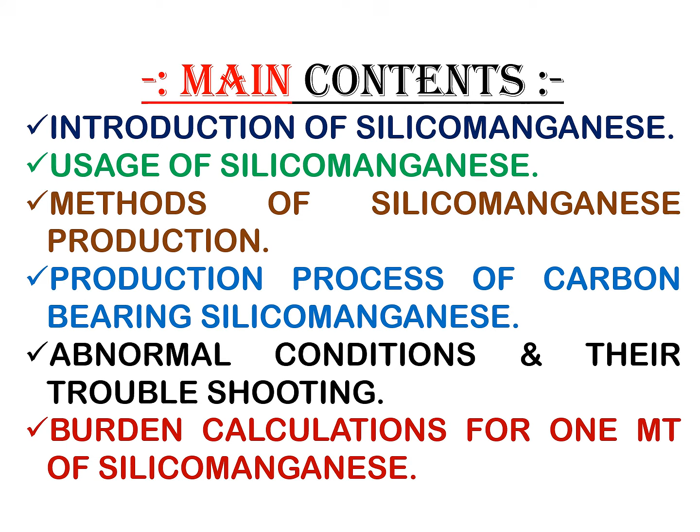This is a very important aspect, as I will teach you how to calculate the burden for 1 metric ton of silicomanganese, and it is very important. So step by step the burden calculation steps I will be covering in this video. So do watch the video till the end. Let's get into the video presentation for today.

To start with, silicomanganese is widely used in extractive metallurgy as a complex reducer, deoxidizer and an alloying addition in the production of various grades of steel.

Moreover, the silicomanganese goes for the production of refined grades of ferromanganese.

Silicides of manganese are more stable compounds than manganese carbides, since the heat of formation of manganese silicide from the elements is 14,000 calories, while that of Mn3C, that is manganese carbide, is 3600 calories. Therefore, the higher the silicon content in silicomanganese, the lower is its carbon content.

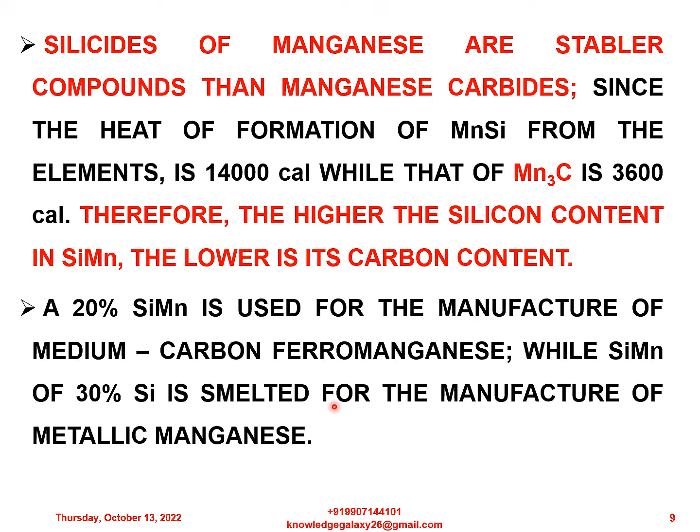The 20% silicomanganese is used for the manufacture of medium carbon ferromanganese, while silicomanganese of 30% silicon is smelted for the manufacture of metallic manganese.

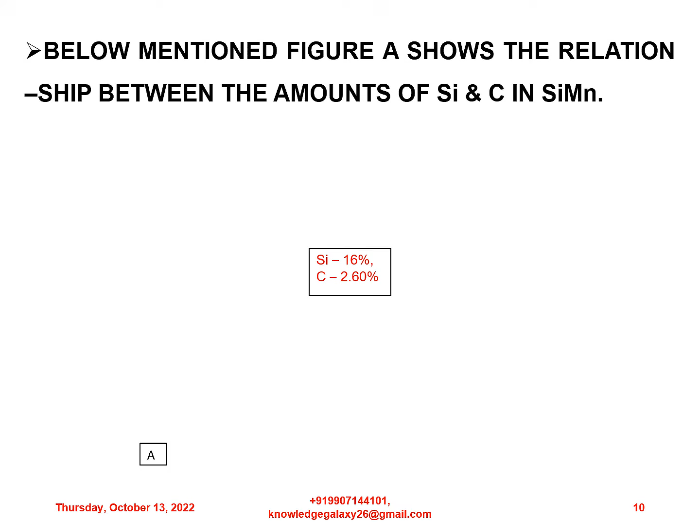This graph shows the relationship between silicon and carbon in the silicomanganese. As can be seen, the optimum silicon content, that is 16%, carries carbon up to 2.6% maximum.

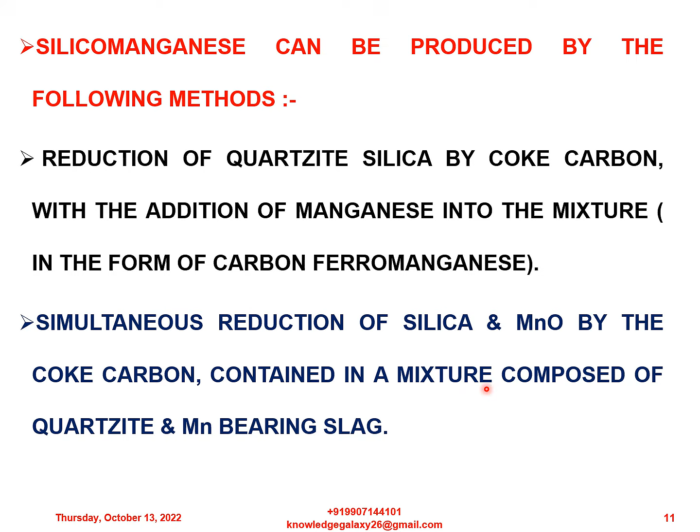Silicomanganese can be produced by the following methods. First, reduction of quartzite silica by coke carbon with the addition of manganese into the mixture in the form of carbon ferromanganese. Second, simultaneous reduction of silica and MnO by the coke carbon contained in a mixture composed of quartzite and manganese bearing slag.

So again, let's move on. The second method is more advantageous, as in this case silicomanganese is obtained by the simultaneous reduction of silica and manganese in the same apparatus, and that is more economical also.

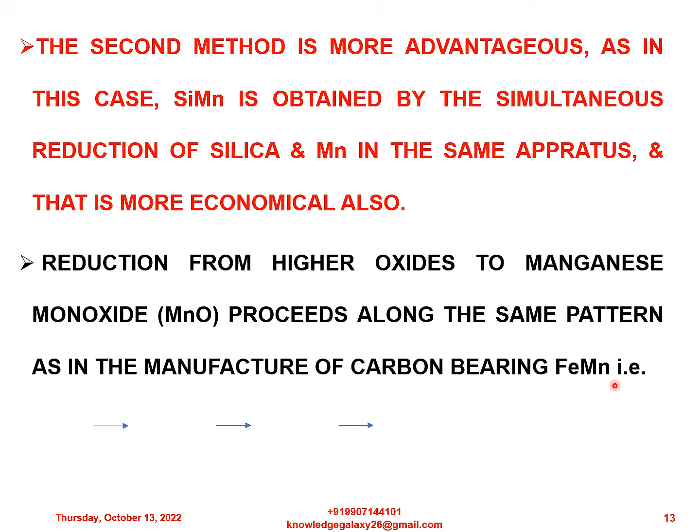Reduction from higher oxides to manganese monoxide, that is MnO, proceeds along the same pattern as in the manufacture of carbon bearing ferromanganese. These are the steps by which manganese higher oxides are converted into lower oxides: MnO2 transforms to Mn2O3, then to Mn3O4, and finally Mn3O4 transforms into MnO.

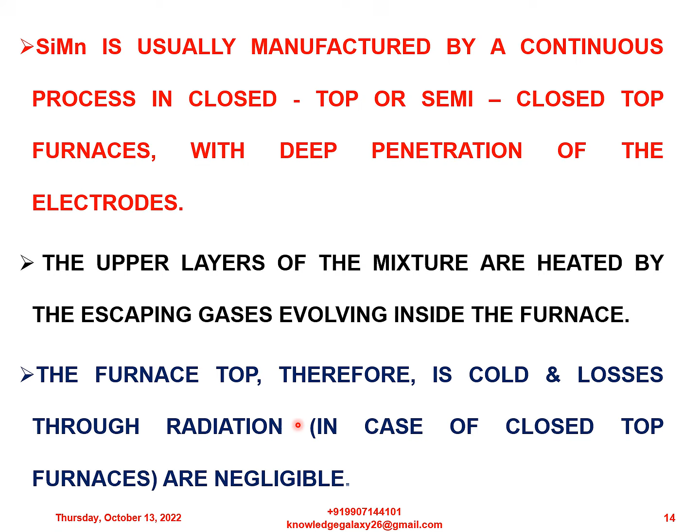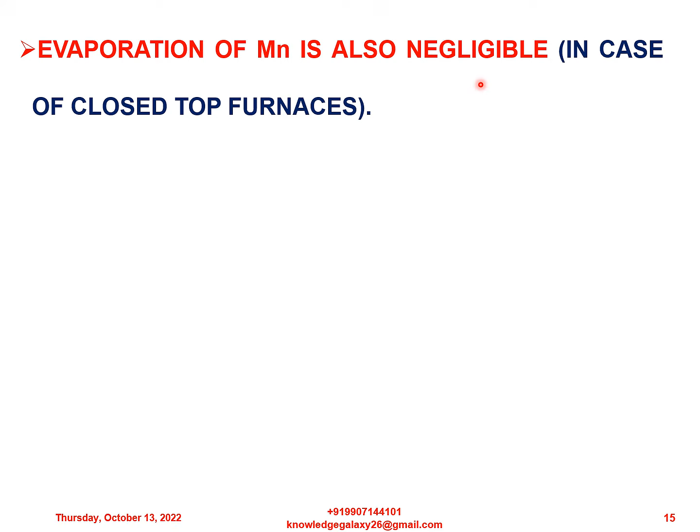Silicomanganese is usually manufactured by a continuous process in closed top or semi-closed top furnaces with deep penetration of the electrodes. The upper layers of the mixture are heated by the escaping gases evolving inside the furnace. The furnace top is therefore cooled, and losses through radiation in closed top furnaces are negligible. Evaporation of manganese is also negligible in closed top furnaces. Silicomanganese with 20 to 25% silicon is easily obtained by this method.

Difficulties arise when the second method is used for manufacturing alloys with higher silicon content, above 25%. This is due to the silica content in the slag rising with increasing silicon content of the alloy, thus raising the viscosity of the slag and rendering its tapping difficult. These difficulties can be overcome by smelting the alloy in small furnaces with higher slag basicity and by introducing small amounts of fluorspar into the mixture.

Silicomanganese is used for the smelting of refined ferromanganese, at present manufactured from a mixture composed of MnO-rich slag, quartzite, manganese ores, fine coke and iron chips. The introduction of MnO-rich slag into the mixture permits the manufacture of silicomanganese with a minimum phosphorus content.

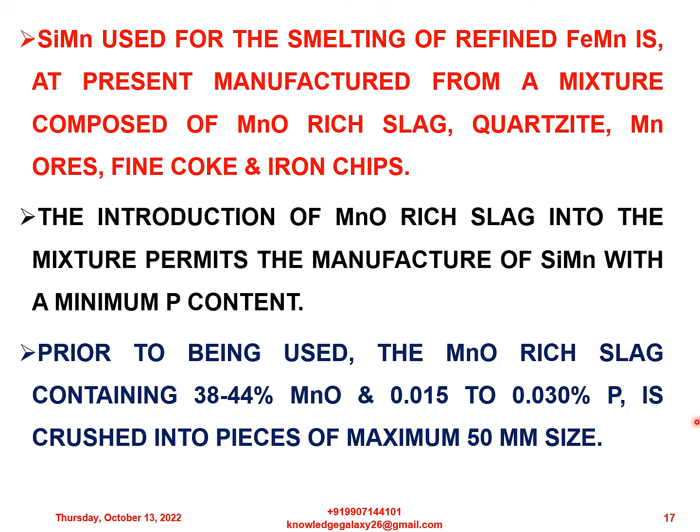Prior to being used, the MnO-rich slag containing 38 to 44% MnO and 0.015 to 0.030% phosphorus is crushed into pieces of maximum 50 mm size. Quartzites should contain a minimum of 96% SiO2 and maximum of 0.012% phosphorus, used in lumps of sizes not more than 60 mm. Fines of less than 10 mm shall be screened out.

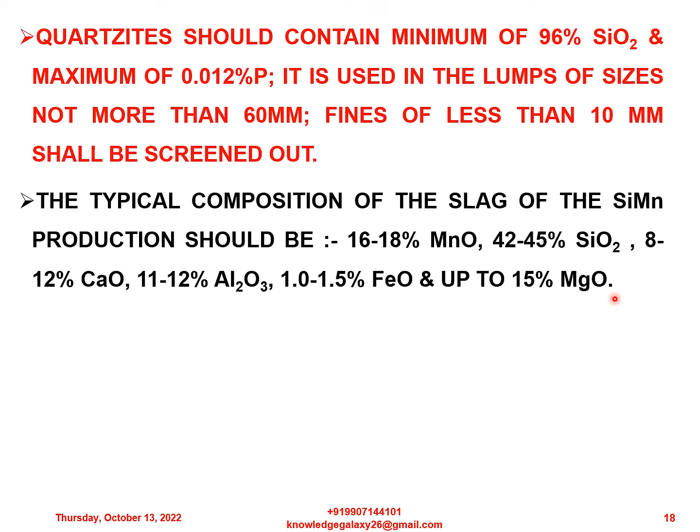The typical composition of the slag of silicomanganese production should be 16 to 18% MnO, 42 to 45% SiO2, 8 to 12% CaO, 11 to 12% Al2O3, 1 to 1.5% FeO and up to 15% MgO. My dear friends, this is very critical information which I just shared with you all, so do remember this very carefully.

Alloy and slag are tapped out simultaneously 3 to 4 times per shift depending upon the liquid metal and slag handling facilities in the tapping bay. Each heat of silicomanganese is analyzed for manganese, silicon, carbon and phosphorus contents.

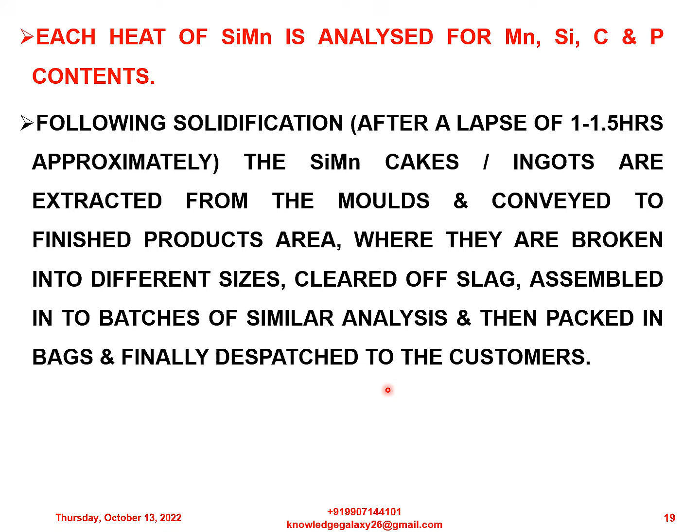Following solidification, after a lapse of approximately 1 to 1.5 hours, the silicomanganese cakes or ingots are extracted from the molds and conveyed to the finished products area where they are broken into different sizes, cleared of slag, assembled into batches of similar analysis, and then packed in bags and dispatched to customers. All activities in the finished products area are done as per customers' requirements.

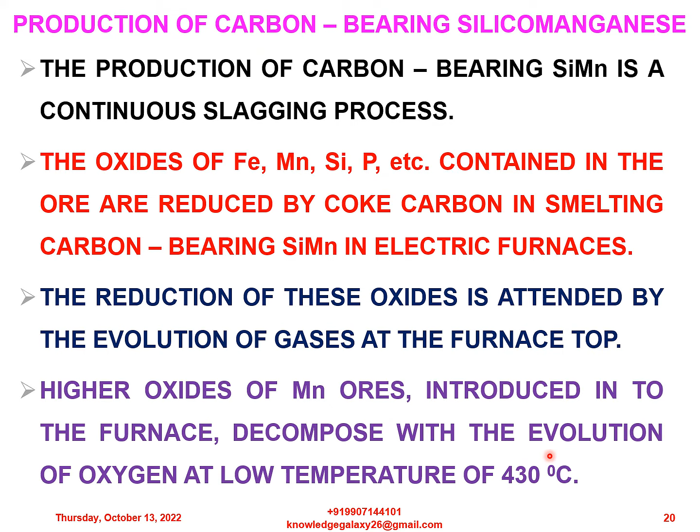Now we will discuss the production of carbon bearing silicomanganese. This is a continuous slagging process. The oxides of iron, manganese, silicon, phosphorus, etc. contained in the ore are reduced by coke carbon in smelting carbon bearing silicomanganese in electric arc furnaces. The reduction of these oxides is attended by the evolution of gases at the furnace top. Higher oxides of manganese ores introduced into the furnace decompose with the evolution of oxygen at low temperatures of 430 degrees Celsius.

The reaction proceeds accordingly: 4MnO2 reduces to 2Mn2O3 plus O2. Manganese oxides decompose at 950 degrees Celsius, according to the reaction: 6Mn2O3 decomposes to 4Mn3O4 plus O2.

Mn3O4 is reduced by carbon monoxide to MnO by the reaction: Mn3O4 plus CO equals 3MnO plus CO2. Consequently, manganese ore reaches the high temperature zone as MnO. My dear friends, always keep in mind the various steps of manganese ore, higher grades to lower grades decomposition.

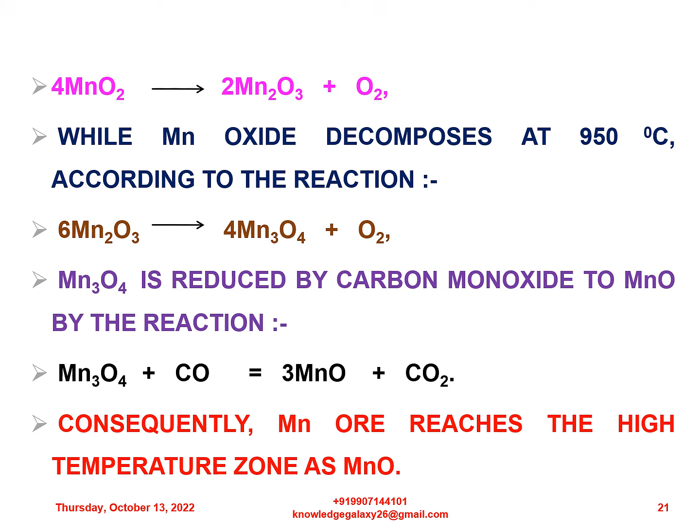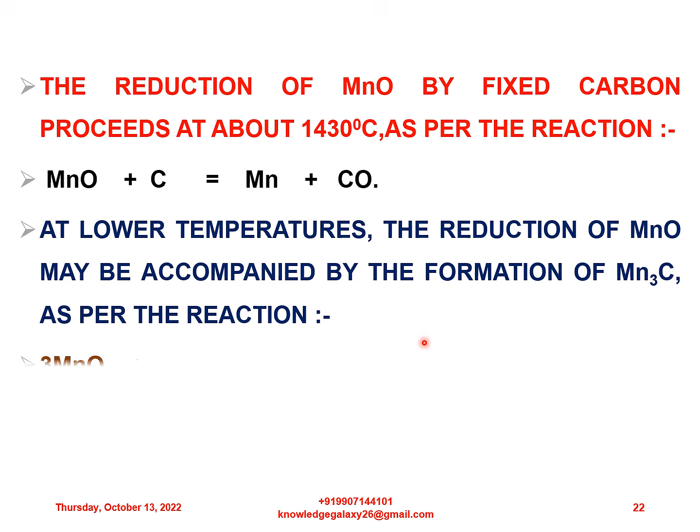The reduction of MnO by fixed carbon proceeds at about 1430 degrees Celsius as per the reaction: MnO plus C equals Mn plus CO. At lower temperatures, the reduction of MnO may be accompanied by the formation of Mn3C as per the reaction: 3MnO plus 4C equals Mn3C plus 3CO. The Mn3C obtained is reverted to the alloy as its melting point is approximately 1250 degrees Celsius.

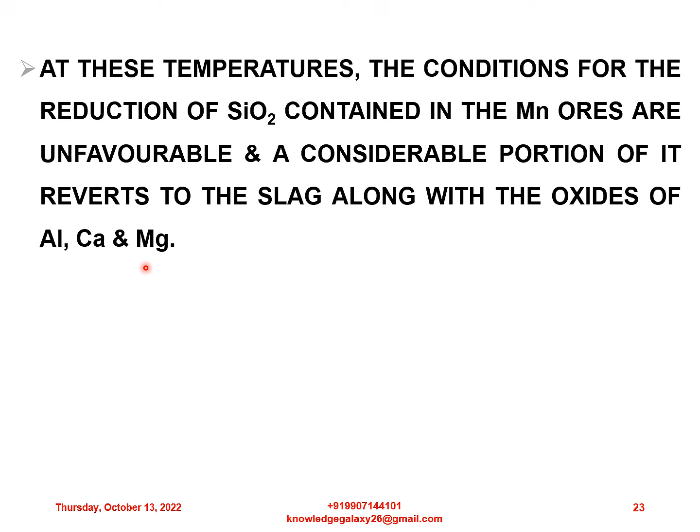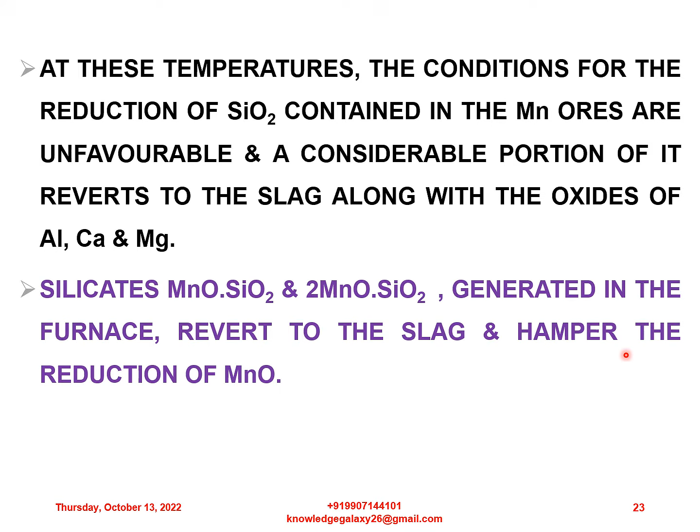At these temperatures, the conditions for the reduction of silica contained in the manganese ores are unfavorable, and a considerable portion of it reverts to the slag along with the oxides of aluminium, calcium and magnesium. Silicates MnO.SiO2 and 2MnO.SiO2 generated in the furnace revert to the slag and hamper the reduction of MnO.

A flux, lime or dolomite, is added to the mixture to cut manganese slag losses. In this case, MnO is freed from the silicates as per the reaction: MnO.SiO2 plus CaO.MgO gives CaO.MgO whole dot SiO2 plus MnO. This way MnO is freed.

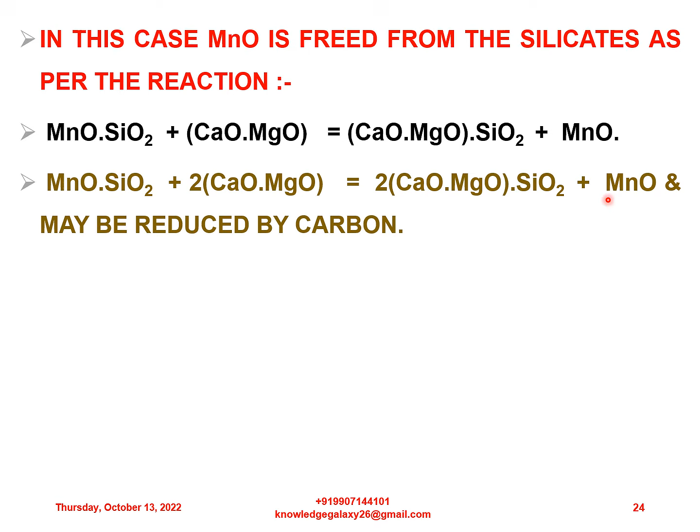MnO.SiO2 plus 2CaO.MgO is equal to 2CaO.MgO whole dot SiO2 plus MnO, and it may be reduced by carbon. When smelting carbon bearing silicomanganese, phosphorus pentoxide, that is P2O5, is readily reduced and reverts to the alloy, thus sharply worsening the silicomanganese quality. About 65 to 70% of ore phosphorus is recovered in the alloy.

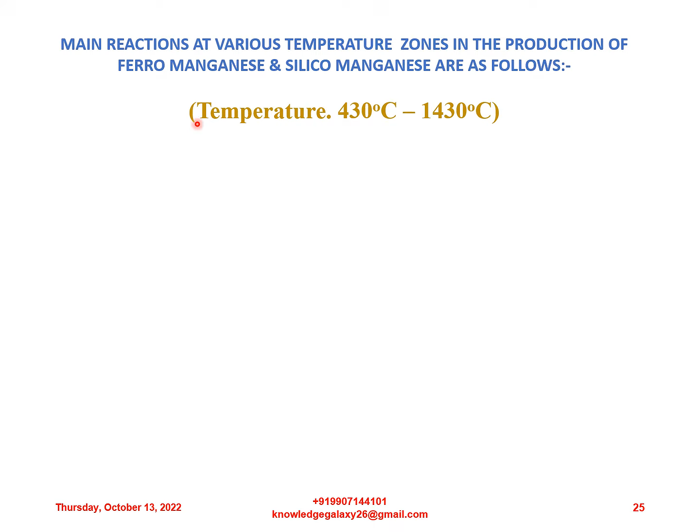So now we will briefly discuss the main reactions at various temperature zones in the production of ferromanganese and silicomanganese. My dear friends, as ferromanganese and silicomanganese are both very much related, their reactions and temperature zones are very much similar, so I am just quickly covering this. The temperature range is 430 degrees Celsius to 1430 degrees Celsius. These reactions are common in both ferromanganese and silicomanganese production.

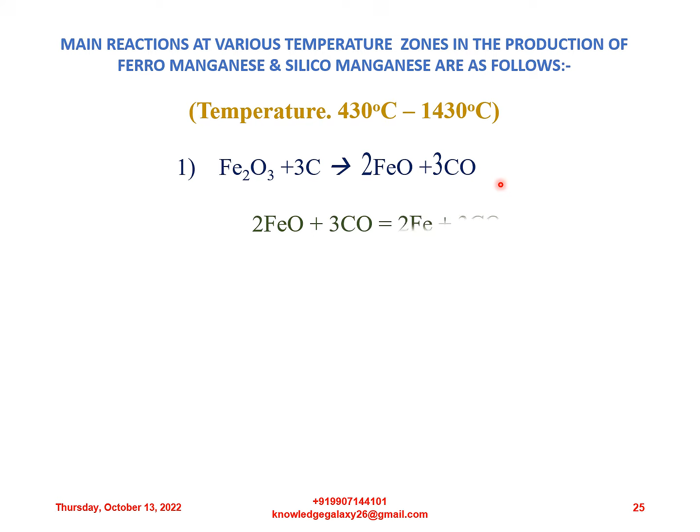First reaction: Fe2O3 plus 3C gives 2FeO plus 3CO. Next: 2FeO plus 3CO gives 2Fe plus 3CO2. Second reaction: MnO2 decomposes into Mn2O3, then it decomposes into Mn3O4, then it decomposes into MnO - higher oxide of manganese reduces into lower oxide of manganese - and finally MnO is reduced by carbon giving Mn plus CO.

Third reaction: SiO2 plus 2C gives Si plus 2CO. And the next reaction: P2O5 plus 5C gives 2P plus 5CO.

So my dear friends, let us now discuss some abnormal conditions and troubleshooting which are very much practical in nature, and I have gained this knowledge over my exposure to practical operations over the years.

The descent of the charge has a serious effect on the smelting procedure. Therefore, it is necessary to ensure a uniform burden movement over the whole furnace area. This is achieved by timely racking of the charge burden onto the electrodes.

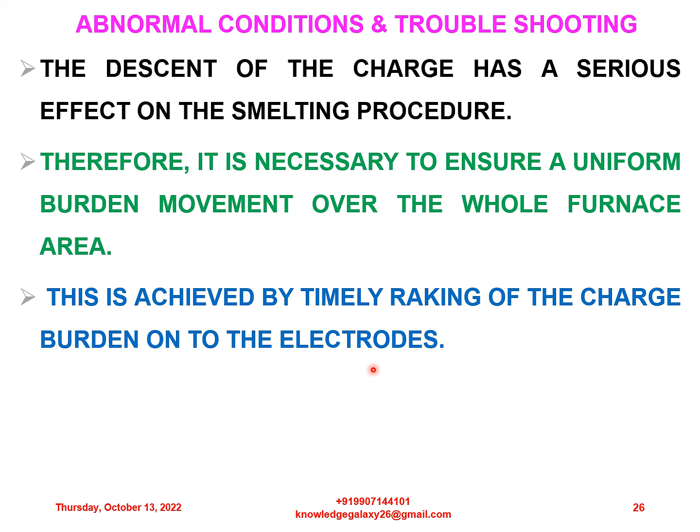For better furnace operation and adequate charge mixing, coke is weighed first, manganese ore second, and then iron chips and fluxes. As soon as the mixture sinks close to the electrodes, new portions of the materials are fed to the furnace. The mixture is conveyed from furnace bins through chutes onto the furnace top.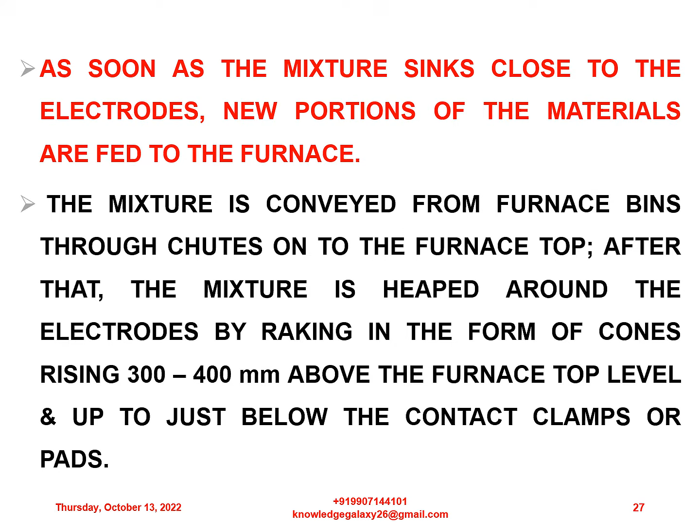After that, the mixture is heaped around the electrodes by raking in the form of cones rising 300 to 400 mm above the furnace top level and up to just below the contact clamps or pads. Normal furnace operation is characterized by the presence of constant charge cones around all electrodes.

Following are the benefits of raking the charged materials around the electrodes. My dear friends, many of you might have faced this question - what is the benefit of raking charged materials around the electrodes? So I am explaining the benefits of raking the charged materials around the electrodes. Do remember these carefully.

First, it ensures uniform evolution of gases over the entire charged surface. Deep and stable positioning of electrodes inside the charge burden means optimum penetration.

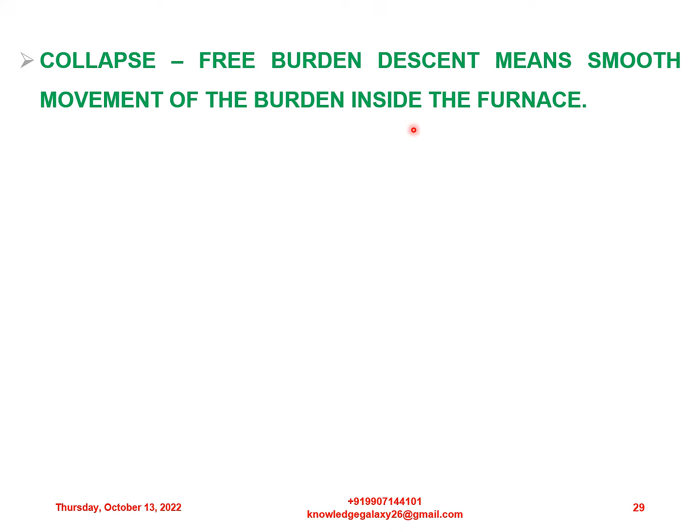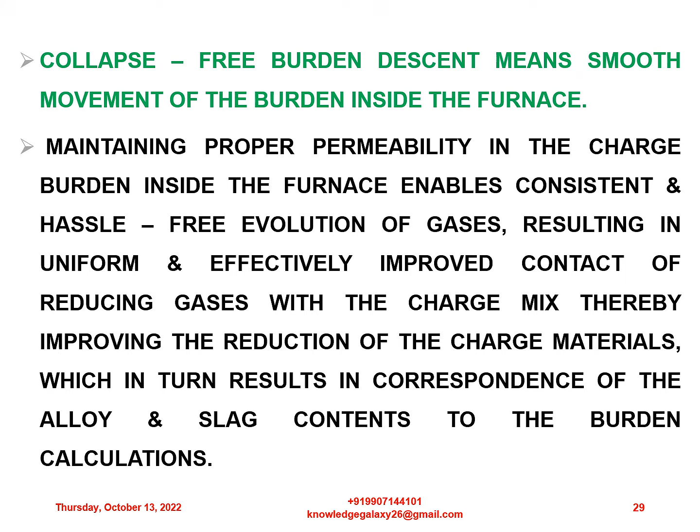Collapse-free burden descent means smooth movement of the burden inside the furnace. Maintaining proper permeability in the charge burden inside the furnace enables consistent and hassle-free evolution of gases, resulting in uniform and effectively improved contact of reducing gases with the charge mix, thereby improving the reduction of the charged materials, which in turn results in correspondence of the alloy and slag contents to the burden calculations. I hope my point is very much clear to you all.

Let's move on. Raking breaks and reduces the formation of bridges, scaffoldings, etc. in the charge mix inside the furnace, thereby increasing the effective reaction crucible volume and improving furnace productivity.

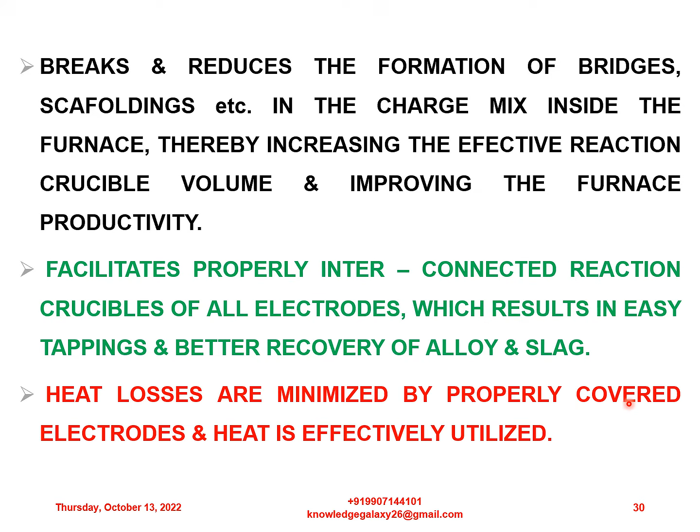It facilitates properly interconnected reaction crucibles of all electrodes, which results in easy tappings and better recovery of alloy and slag. Heat losses are minimized by properly covered electrodes, and heat is effectively utilized.

The charged materials prevent atmospheric air from contacting the hot electrodes, which would get eroded if exposed to air, eventually resulting in electrode breakage. So I hope you understand why raking of charged materials is important.

If the furnace works normally, the charged materials reach the high temperature zone well prepared and heated.

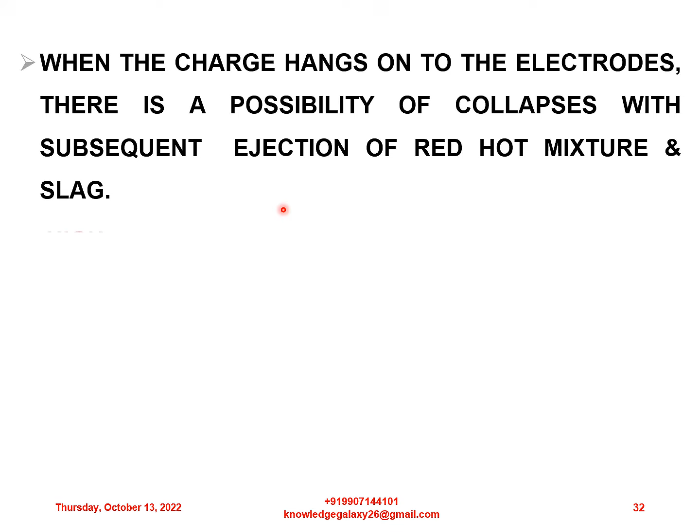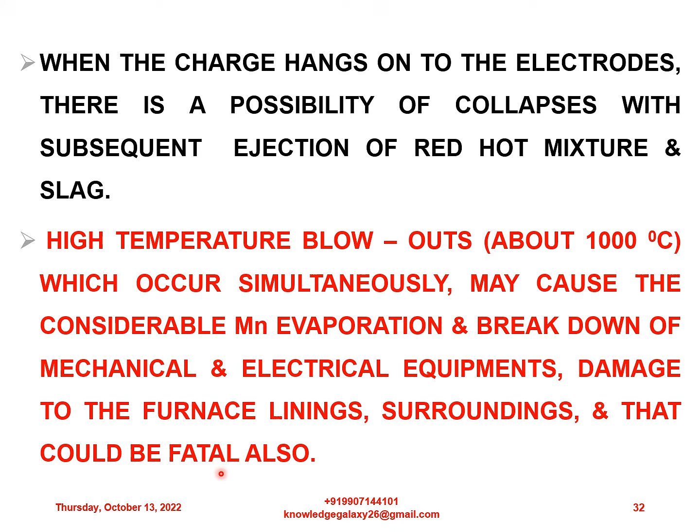When the charge hangs onto the electrodes, there is a possibility of collapse with subsequent ejection of red hot mixtures and slag. High temperature blowouts of about 1000 degrees Celsius, occurring simultaneously, may cause considerable manganese evaporation and breakdown of mechanical and electrical equipment, damage to furnace linings and surroundings, and could be fatal.

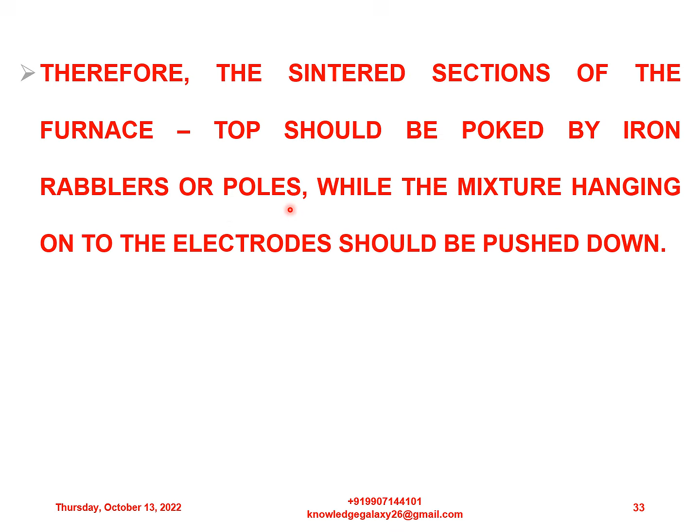Therefore, the sintered sections of the furnace top should be poked by iron rabblers or poles, while the mixture hanging onto the electrodes should be pushed down.

Deviation from normal furnace operation may be caused by lack or excess of reducing agent in the charge mixture. In the former case, the alloy has low manganese and silicon and high phosphorus content. Electrode penetration is excessively deep, power input at the electrodes fluctuates, manganese losses in the slag increase, furnace productivity falls, and specific power consumption rises.

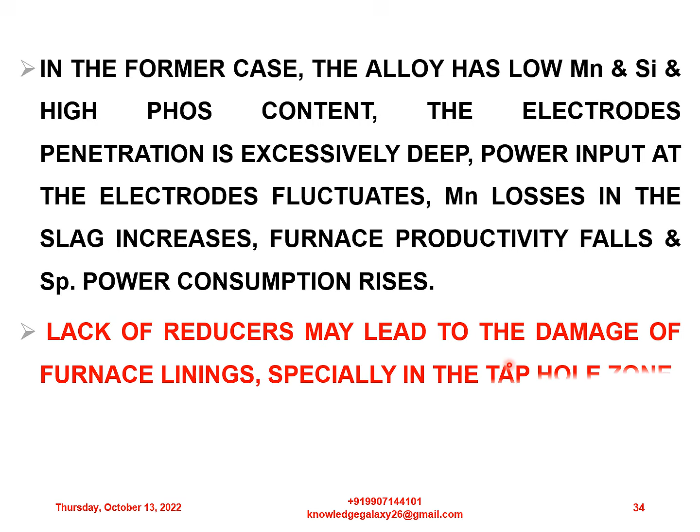Lack of reducers may lead to damage of furnace linings, especially in the tap hole zone.

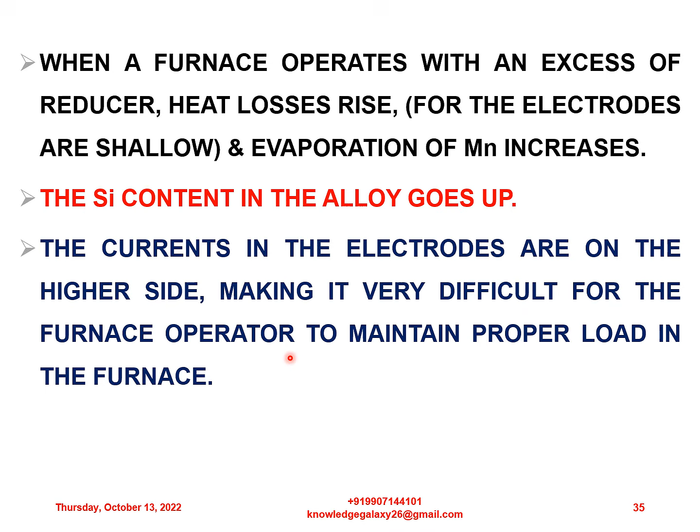When a furnace operates with an excess of reducer, heat losses rise, electrode penetration is shallow, and evaporation of manganese increases. The silicon content in the alloy goes up. The currents in the electrodes are on the higher side, making it very difficult for the furnace operator to maintain proper load in the furnace.

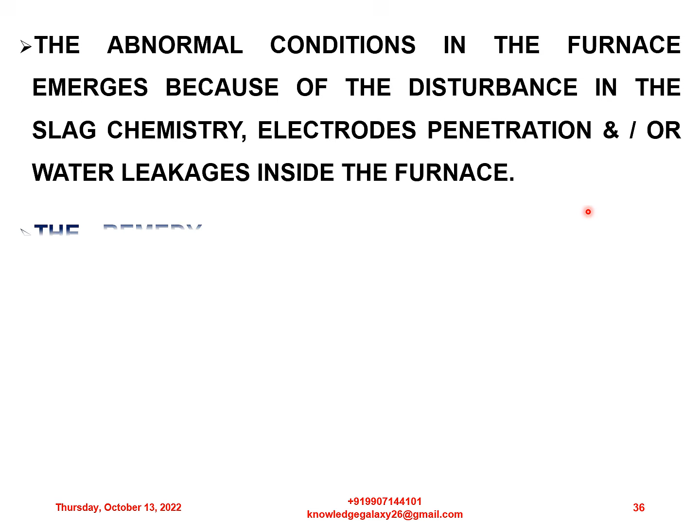Abnormal conditions in the furnace emerge because of disturbances in the slag chemistry, electrode penetration, and/or water leakages inside the furnace. The remedy also varies depending on the actual causes of the problem.

SiO2 content in the slag should ideally be around 42 to 45%, and the basicity should be between 0.4 to 0.6. Al2O3 content also plays a vital role in the slag chemistry and should be in the range of 13 to 20% maximum. If it crosses about 20%, the slag becomes very high melting and doesn't flow out of the furnace.

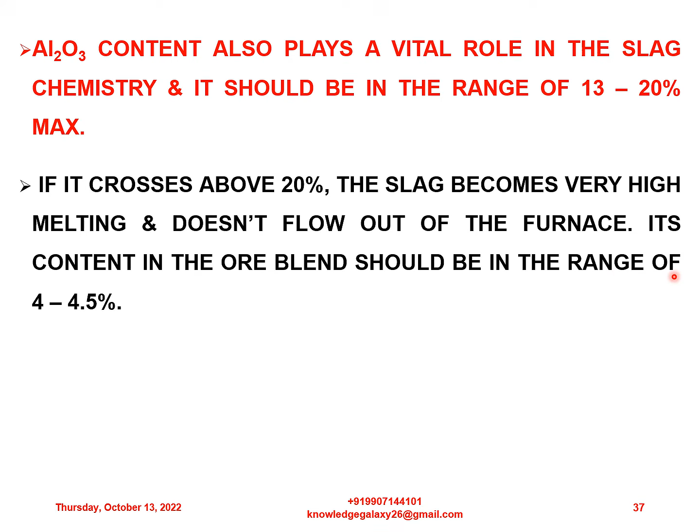Its content in the ore blend should be in the range of 4 to 4.5%.

To set the furnace right, raw materials proportioning, that is burden calculation, and the size of the reducers should be checked, and additional amount of reducers charged, and if necessary, coke weight per charge portion may be increased.

In this case, the size and weighing accuracy of coke should also be checked, and extra manganese ore should, if necessary, be charged onto the electrodes.

In all cases of furnace trouble, technological procedures at the furnace top should be intensified.

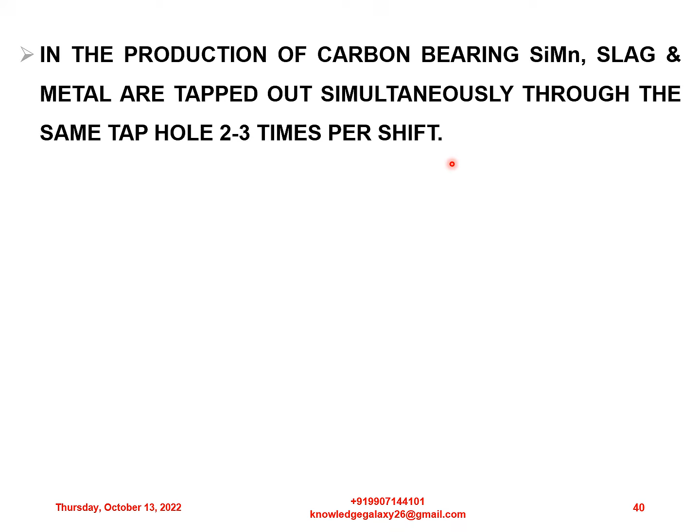In the production of carbon-bearing silicomanganese, slag and metal are tapped out simultaneously through the same tap hole, 2 to 3 times per shift. The liquid metal and slag are separated by the skimmer dam block arrangement, where they get separated from each other due to the difference in specific gravity.

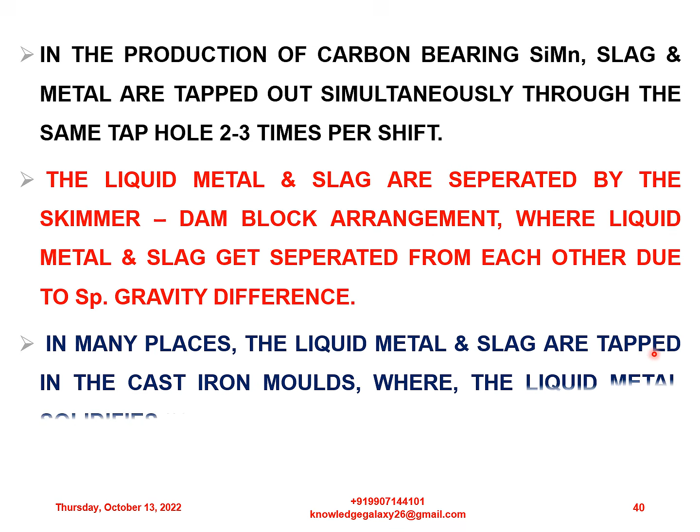In many places, the liquid metal and slag are tapped into cast iron molds, where the liquid metal solidifies in the mold itself and the slag overflows to the sand beds for solidification.

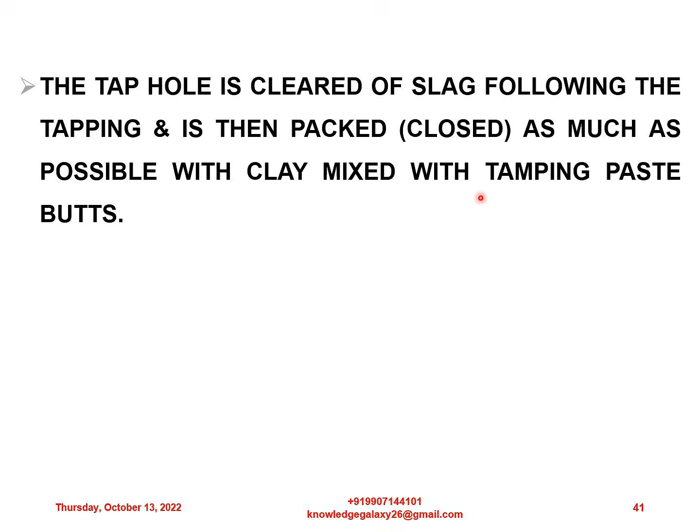An alloy and slag sample is taken to examine the quality and grade of the alloy and slag produced, and it is analyzed for manganese, silicon, sulfur and phosphorus contents in the alloy, and oxides and basicity in the slag.

After solidification, but prior to getting too cold, the metal and slag cakes are sent to the finished product yard with the help of EOT cranes for further breaking, sizing, packing and delivery to customers as per their requirements.

My dear friends, here I would like to mention the standard grades of products. I am covering both ferromanganese and silicomanganese, domestic as well as export market grades. I will just briefly go through this; you can read it as per your convenience by pausing the video.

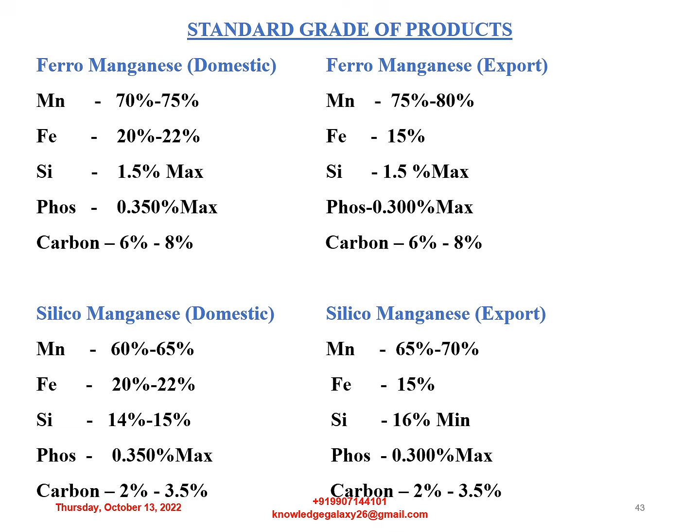These grades are standard across all companies and internationally accepted, and they may vary according to consumer requirements. Let's move on.

Furnace crews should concentrate on bringing down per-ton losses of manganese and specific power consumption, as raw materials and power are the highest cost items in the production of high carbon silicomanganese.

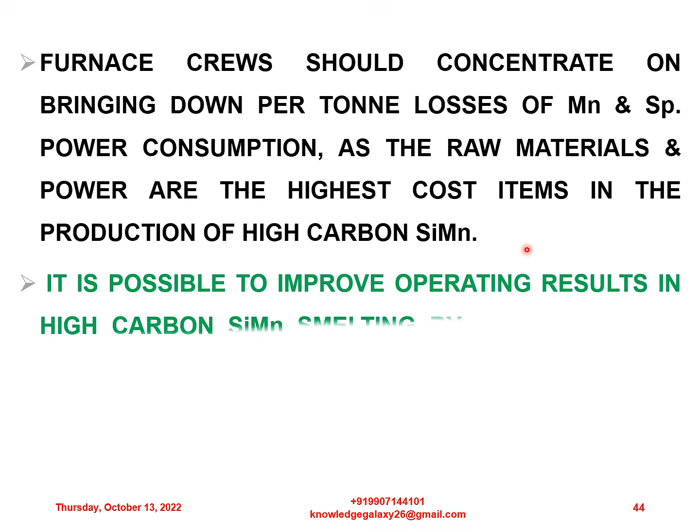It is possible to improve operating results in high carbon silicomanganese smelting by using closed top electric furnaces, which bring down the cost price of the alloy and improve the working conditions of the furnace operators.

So my dear friends, now I am going to describe in detail about the burden calculation or material balance. This is a very important aspect, as it determines the expertise of the furnaceman, how to control the furnace operation and how to make very good quality material at a minimum operating cost.

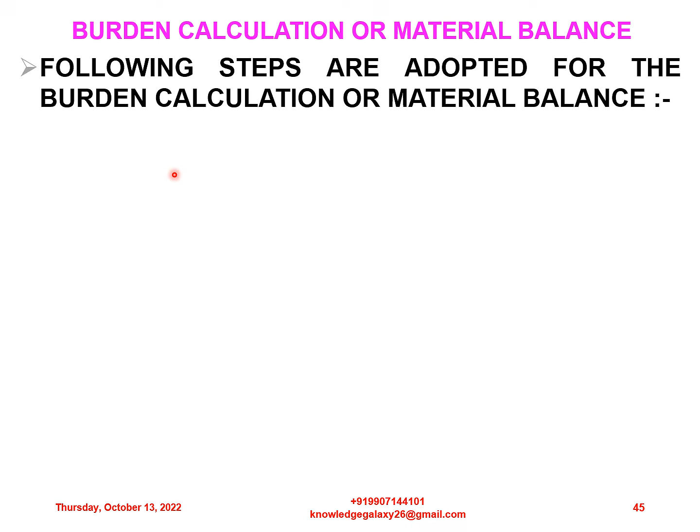So let us start. Following steps are adopted for the burden calculation or material balance. Here I will describe in detail each step very precisely so that you can learn how the burden calculation is done.

It starts with taking the final product specifications and raw material specifications and reverse calculation of the required manganese ore, quartzite, reductants and flux quantities for the production of 1 metric ton of alloy.

Let us consider the product specifications as in alloy: manganese 60%, carbon 2.20%, silicon 15%, phosphorus 0.3%, sulfur 0.03% and iron 20%. This is popularly known as 60-15 grade of silicomanganese, where 60 corresponds to manganese percentage and 15 corresponds to silicon percentage in the alloy.

This is the most common grade for domestic use, so I am explaining the burden calculation of it. Now slag: MnO 13%, FeO 1.5%, SiO2 47%, MgO 8%, CaO 12%, Al2O3 13%.

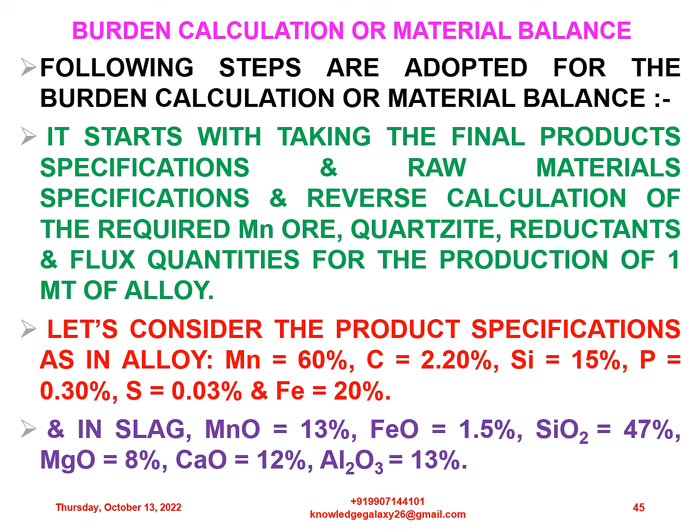So let us consider the raw material specifications as manganese 35%, Fe 6.4%, phosphorus 0.20%, SiO2 13%, quartz SiO2 96%, Al2O3 1.9%, CaO 0.56%, MgO 0.7% and moisture 8%, and moisture in quartz 1%.

My dear friends, raw material analysis should be precise and accurate because the whole burden calculation depends on this raw material analysis.

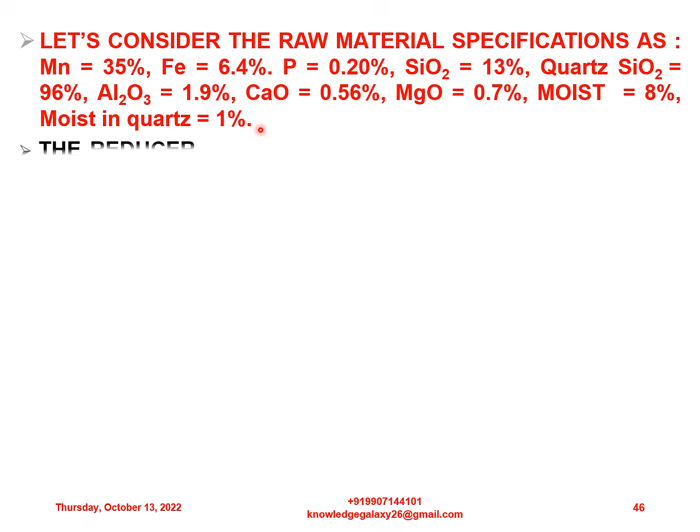The reducer fine coke contains 70% fixed carbon and 14% of SiO2. Dolomite containing 50% CaO plus MgO serves as flux.

So let us consider the recovery of each element as follows. Recovery of each element is also very important, as how much percentage we will be getting in alloy, how much will be lost in slag. So we have to always keep this in mind for correct and efficient accurate burden calculation.

So in metal we get manganese of 82% recovery, recovery of iron is 97%, silicon recovery is 52%, phosphorus 80%, sulfur 8% and carbon 5.5%.

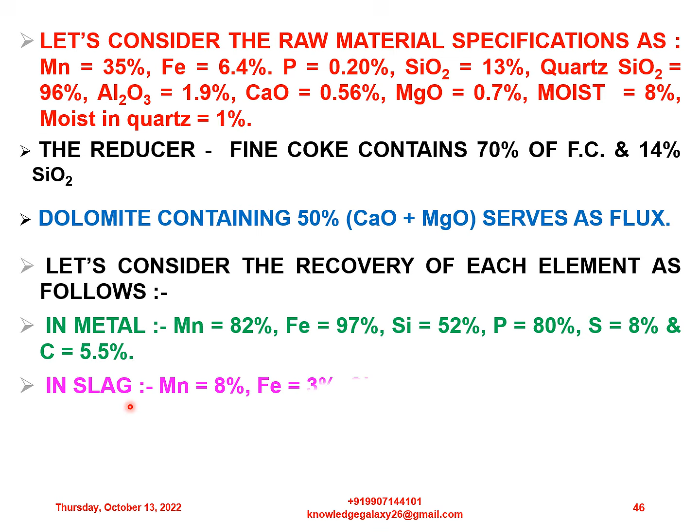In slag we lose manganese 8%, iron 3%, silicon 45% and phosphorus 20%. In gas losses we lose manganese 10%, silicon 3% and sulfur 92%, and carbon

94.5%. You have to always keep in mind all the recoveries and losses so that you can calculate the burden very accurately and precisely.

The amount of fixed carbon in the mixture exceeds the stoichiometric amount by 25%.

Moving on, so let us first calculate required manganese ore for 1 metric ton of alloy. So here comes the calculation: 600 divided by 0.35 into 0.82 into 0.92 is equal to 2272 kg of dry ore.

My dear friends, you might be surprised from where these 600 and other figures came. This 600 corresponds to 60% manganese in ferroalloy silicomanganese grade, and 0.35 is the 35% grade of manganese ore. 0.82 is the 82% recovery of manganese in silicomanganese, and 0.92 is 8% moisture minus the dry quantity. So all this equation comes to 2272 kg of dry ore.

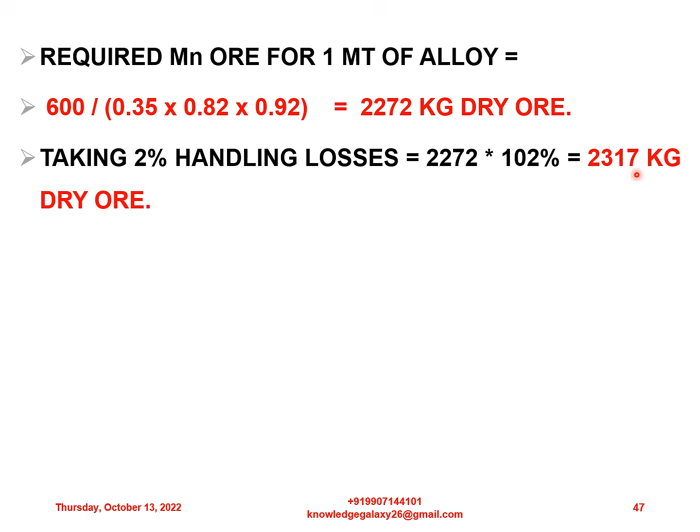And now taking 2% handling losses, it comes to 2272 into 102%, that is 2% handling losses, comes to 2317 kg of dry ore.

So now amount of manganese reduced by the reaction MnO plus C is equal to Mn plus CO. So it gives 2317 into 0.35 into 0.82 into 55 whole divided by 71 is equal to 515 kg. 55 is the atomic weight of manganese and 71 is the atomic weight of MnO, that is manganese plus oxygen.

Comes to 515 kg. Next is amount of iron reduced by the reaction FeO plus C is equal to Fe plus CO. It comes to 2317 into 0.064 into 0.97 into 56 whole divided by 72.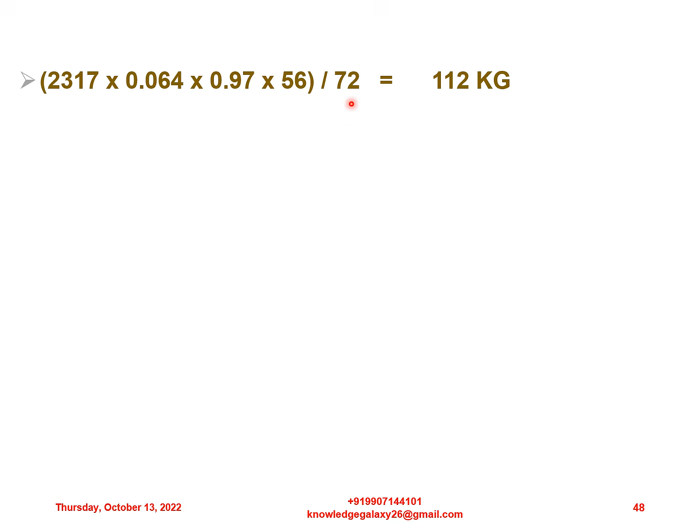Here 0.064 is 6.4% content of iron in ore, 0.97 is 97% recovery of iron, and 56 is atomic weight of iron, 72 is atomic weight of FeO. It comes to 112 kg.

Mn and Fe total comes to 515 plus 112 equal to 627 kg.

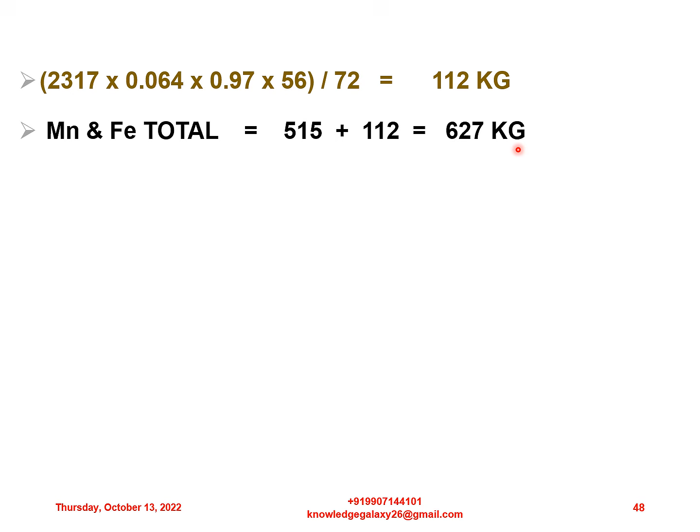The manganese and iron content in the alloy, the sum of carbon and silicon is subtracted, averages 100 minus 2.2 plus 15 is equal to 82.8%.

The amount of alloy obtained is equal to 627 divided by 0.828 is equal to 757 kg. I hope all these steps are very much clear to you all. Please do watch and remember all these steps very carefully so that you can do a very accurate and efficient burden calculation.

Next, moving on. The amount of silicon in it is 757 into 0.15 is equal to 114 kg. This 0.15 is 15% silicon in the alloy.

Moving on next, the amount of carbon necessary. So here I am going to describe how to calculate the required carbon. For the reduction of MnO, according to the reaction MnO plus C is equal to Mn plus CO, 515 into 12 divided by 55 is equal to 112 kg.

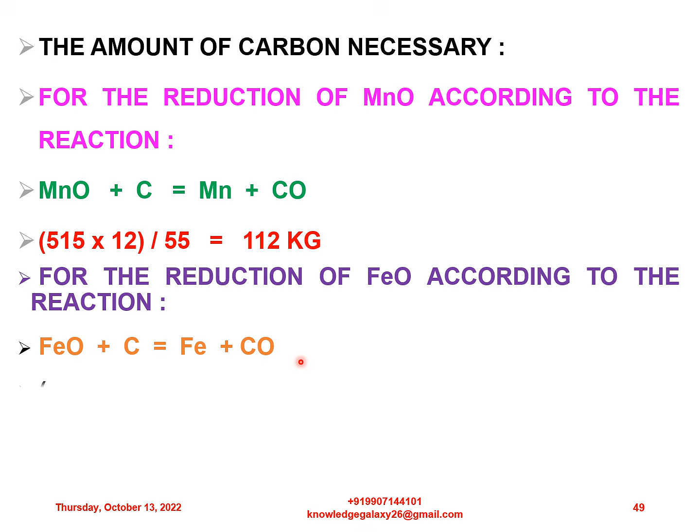For the reduction of FeO, according to the reaction FeO plus C equals Fe plus CO, it comes to 112 into 12 divided by 56, which comes to 24 kg.

Next, for the reduction of SiO2, according to the reaction SiO2 plus 2C equals Si plus 2CO, putting the values here, 114 into 60 by 28 into 24 divided by 28 is equal to 209 kg.

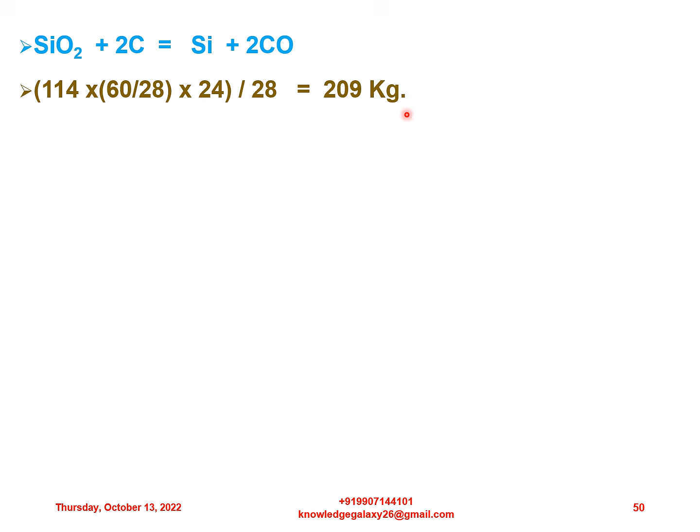For the carbonization of the alloy, 627 into 0.022 is equal to 14 kg.

Next comes total amount of fixed carbon necessary, which is the sum of all total: 112 plus 24 plus 209 plus 14 comes to 359 kg.

Amount of dry fine coke necessary including 25% excess is equal to 359 into 1.25 divided by 0.7 is equal to 641 kg. Here 0.7 is 70% fixed carbon of the coke.

Next, amount of wet fine coke necessary having 8% moisture is equal to 641 divided by 0.92 is equal to 696 kg.

My dear friends, don't get confused with these two different quantities, as 641 is the dry coke quantity and 696 is the wet fine coke quantity. They are two different and separate quantities.

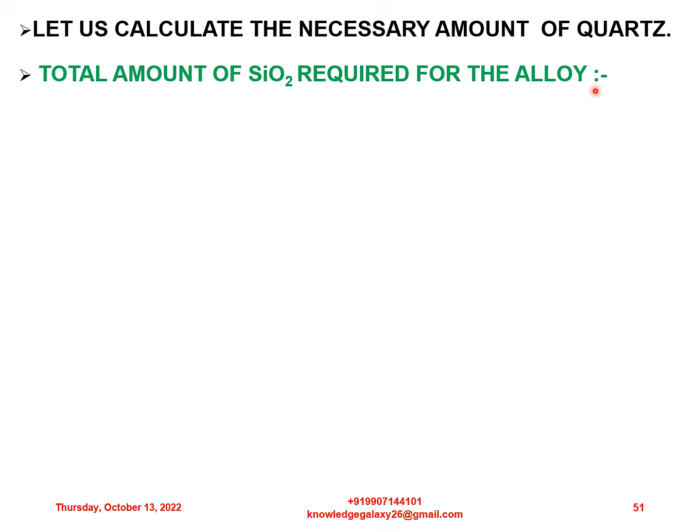So now let us calculate the necessary amount of quartz. Total amount of SiO2 required for the alloy is given by 150 into 60 by 28, whole divided by 0.52, comes to 618 kg.

SiO2 introduced with the dry ore is given by 2317 into 0.13 is equal to 301 kg. SiO2 introduced with the dry coke is given by 641 into 0.14 is equal to 90 kg.

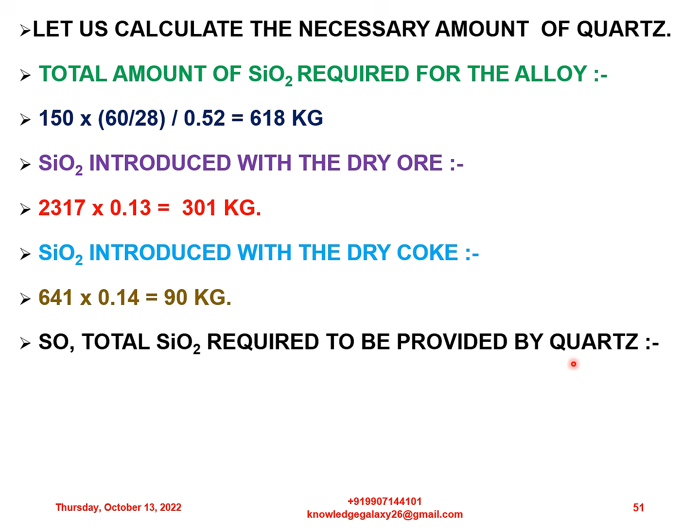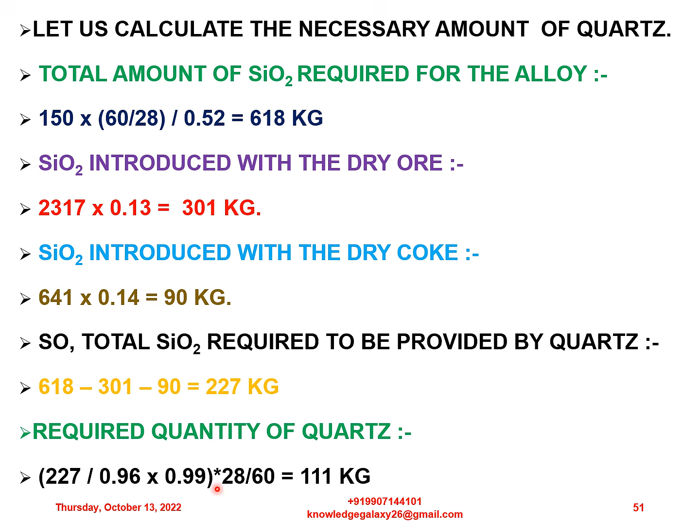So total SiO2 required to be provided by quartz is given by 618 minus 301 minus 90, comes to 227 kg. So required quantity of quartz can be calculated by 227 divided by 0.96 into 0.99 into 28 by 60, equal to 111 kg.

So let us now calculate the necessary amount of dolomite, X being the amount of dolomite introduced with the dry ore. It comes to SiO2: 2317 into 0.13 is equal to 301 kg.

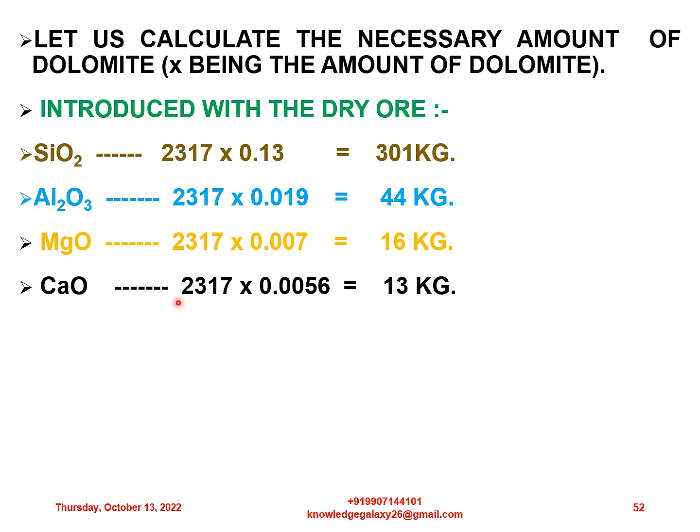Al2O3: 2317 into 0.019 is equal to 44 kg. MgO: 2317 into 0.007 is equal to 16 kg. CaO: 2317 into 0.0056 is equal to 13 kg.

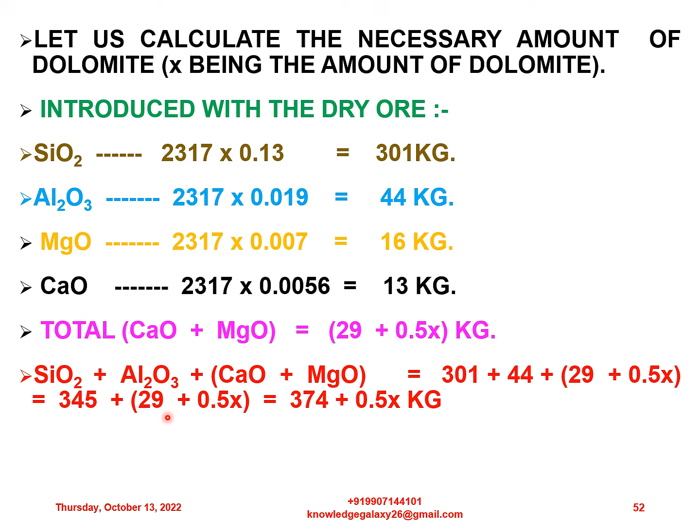So total CaO plus MgO is equal to 29 plus 0.5x kg. SiO2 plus Al2O3 plus CaO plus MgO, sum of total, is equal to 301 plus 44 plus 29 plus 0.5x, equal to 345 plus 29 plus 0.5x, equal to 374 plus 0.5x kg.

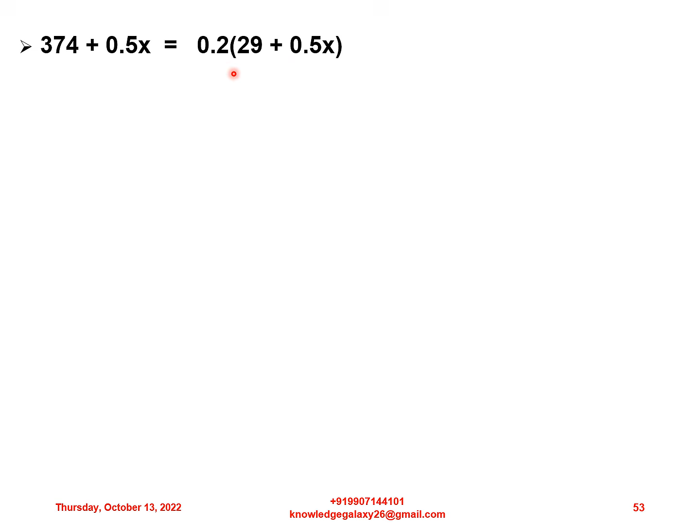So 374 plus 0.5x is equal to 0.2 into 29 plus 0.5x. Here 0.2 is 20% in slag.

Equation comes to 374 plus 0.5x equals 0.2 into 29 plus 0.2 into 0.5x. Simplifying the calculations, 374 divided by 5.8 is equal to 0.5x minus 0.1x. So x is equal to 64 divided by 0.4, equal to 160 kg.

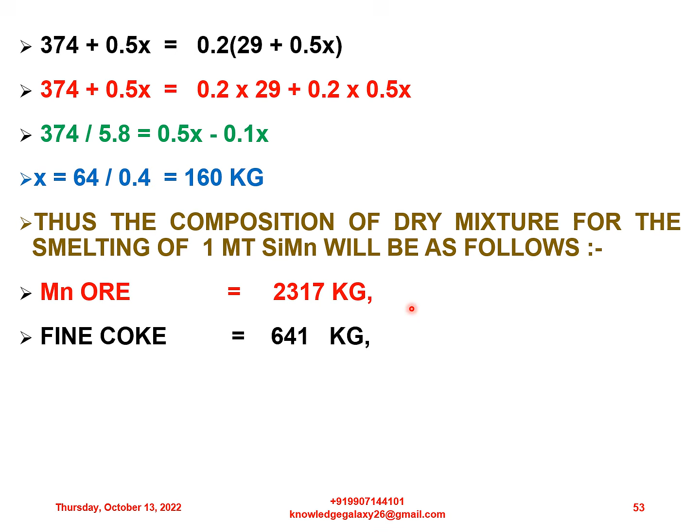Thus, the composition of dry mixture for the smelting of 1 metric ton of silicomanganese will be as follows: we have calculated all the quantities. Manganese ore 2317 kg, fine coke 641 kg, quartz 111 kg, and dolomite 160 kg.

I hope this calculation is very much clear to you all, and I have covered the calculation of each element very precisely, so you can learn this burden calculation very accurately and precisely.